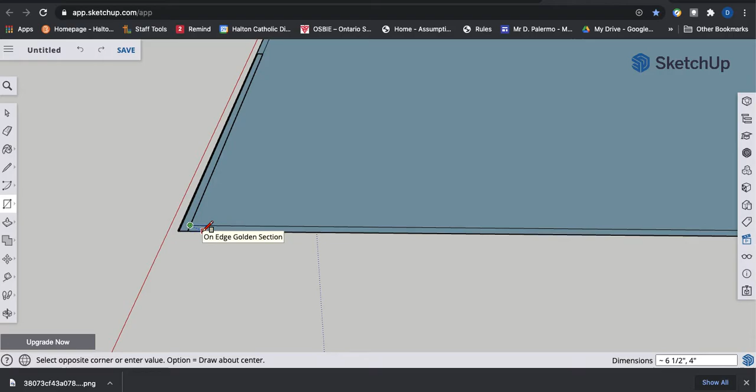To begin, I'm going to hit R on my keyboard for rectangle, and I'm going to create a 2x4 here. So let's just go 2, 4. Although remember, it is 1.5 by 3.5 in actuality. Sorry about that—actually, let's undo that.

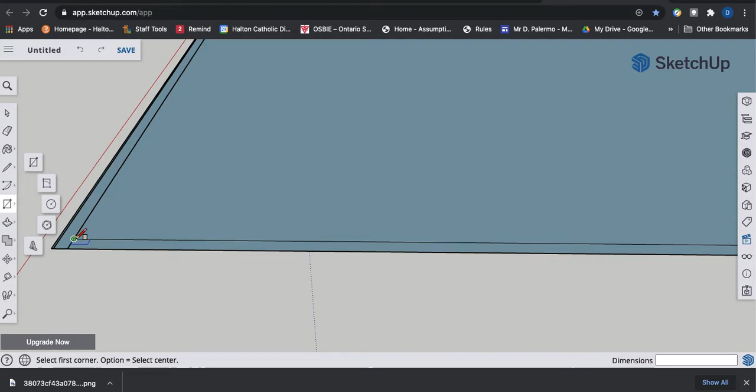I'm going to create my base first, not my stud. So again, let's create another one. Now typically a 2x4, let's say it's a 12-foot piece of 2x4. So I'm going to make it 12 feet—12 apostrophe—and then 4, comma 4, for 4 inches.

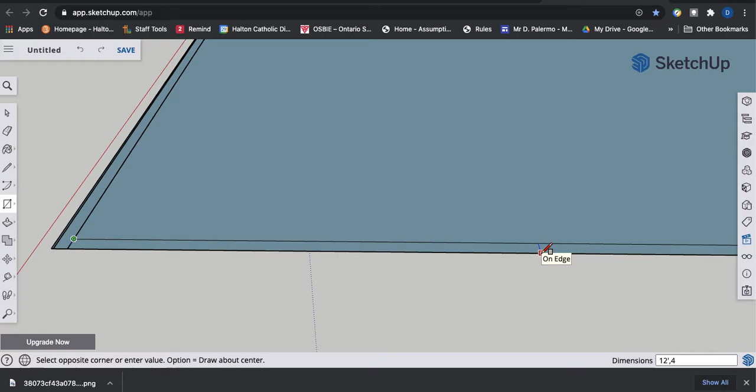Notice I don't have to put the inch mark for inches, because SketchUp recognizes that if you don't put anything there, it's just inches. Okay, so there you go—you have our rectangle there.

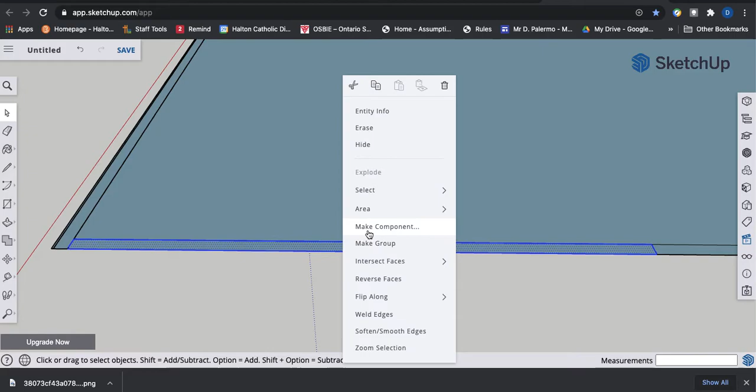Now to select that object, because I want to make it a component before I pull on it or raise it up, I'm just going to start selecting. I'll start with the face, and I'm holding Shift on my keyboard to select multiple items here. There it is, I've selected it all, and I'm going to right click, make component. Let's just call this my 12-foot base.

Now if I want to push pull this base up, I need to double click into the component, press P on my keyboard for push pull, and I'm going to raise it 2 inches, or 1.5 inches in actuality, as the base part of my frame.

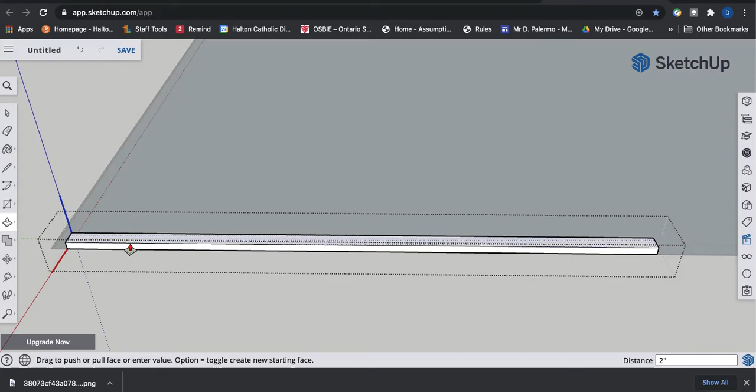What I'm then going to do now is exit out of this component, so I'm just going to choose my select tool and double click in the blank space there. And if I orbit around just so I can see the very front here, pan across...

I'm now going to create another component for my vertical stud. So I'm going to draw another rectangle—this time it's going to just be a 4-inch by 2-inch.

You can see on the bottom right, you might be wondering, should it be 2 comma 4 or 4 comma 2? Well, I know that I drew this 2x4 to be 4 inches, so you can see that the second number there must be the 4 inches. So it must be 2 comma 4. All right, there's my 2x4.

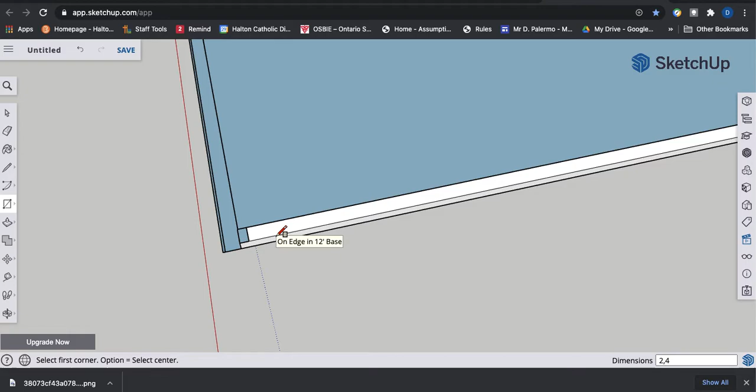And now again, I'm going to use the select tool and maybe zoom in a bit so I can see. I'm going to select the face, hold Shift, select my edges, and right click, make component—vertical component.

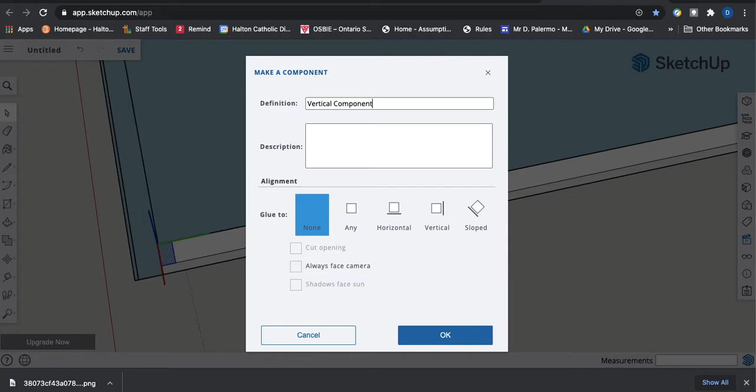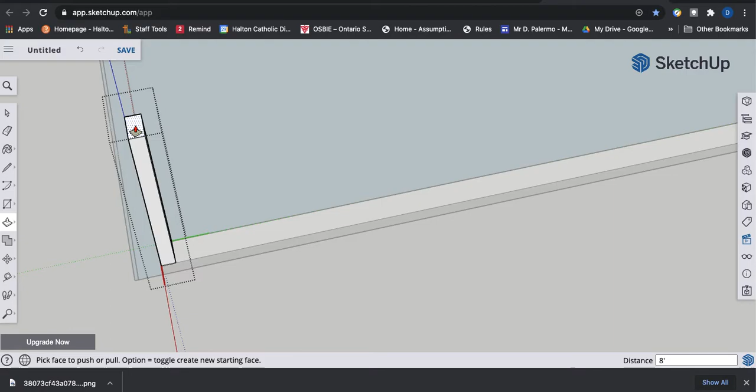All right, double click there and press P on your keyboard for push pull, and let's just assume that our ceiling is going to be roughly 8 feet tall. So I'm going to pull that and just type 8 apostrophe for 8 feet. Again, I'm going to use the select tool and double click outside of that component, and let me zoom out so I can see what I'm working with here.

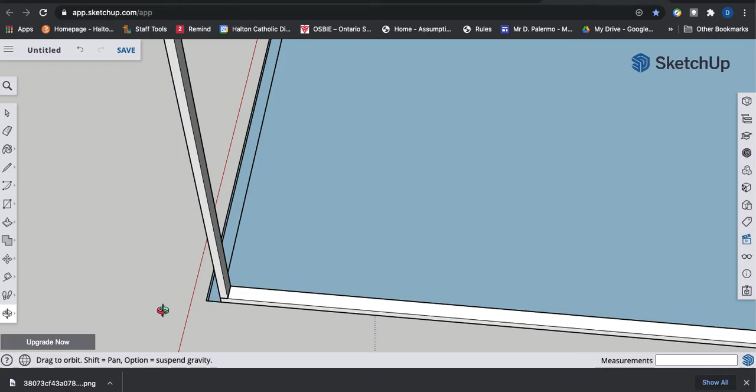Next, I'm going to copy this vertical stud over X amount of times. First, I'll hit the select tool and click once on the component—don't double click it, just click once because I want to move it. Then hit the move button and grab that front corner. I guess it doesn't matter which corner you grab.

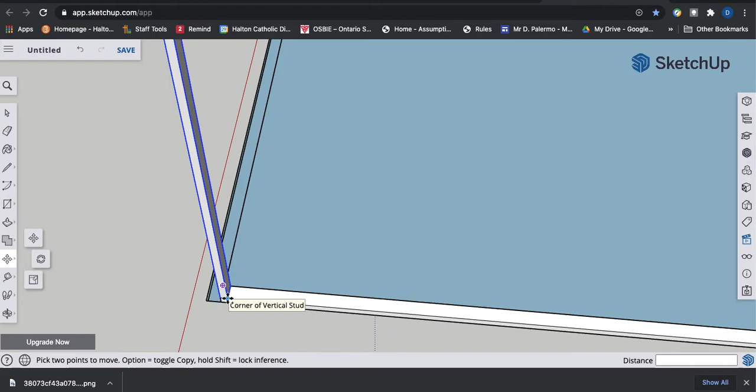What you want to do is hold Alt if you're on a Mac, or Control on a PC—it's either Control or Alt, just double check that. When you press it, you'll see a plus sign pop up. Let me do that again. As I'm hovering my move tool, if I press Alt, you can see that little plus sign showed up, and now when I click, I can actually make multiple copies.

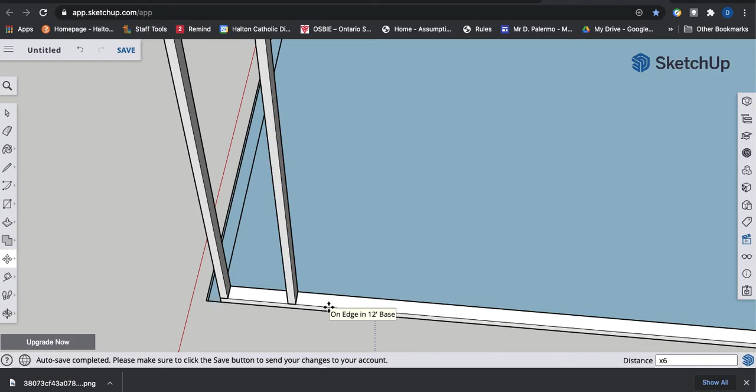Now I want to make this 18 inches away, so I'll pull that out and type 18. Now, without typing anything else, if I press X and then say 6, that means I want 6 copies in total, including the one I just made. So once I move it 18 inches, don't click anything, just type X and then however many you want, then hit enter. You can see 6 copies were made, including the first one I had moved.

So that's a pretty useful tool there—that X and then the number of copies you want to make. That'll get your room, your basement, framed up pretty quickly.

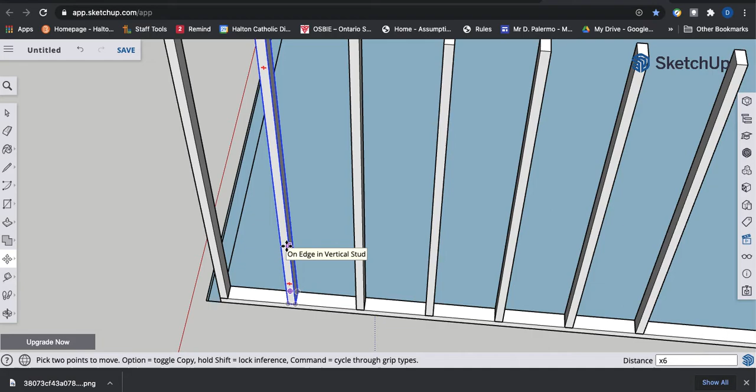Just remember that the corners of each room should have a 2x4 for each corner. There should be another 2x4, like here for example, starting there and going out this way—something like 2x4s butted up against each other for each corner of a room. Remember, you're going to be putting the drywall up against there, and you want it screwed in at its ends for sure. So make sure you do that.

Now, if you're a little bit off there, it's okay—if you're an inch away or whatever, it doesn't have to be exact, but just keep that in mind.

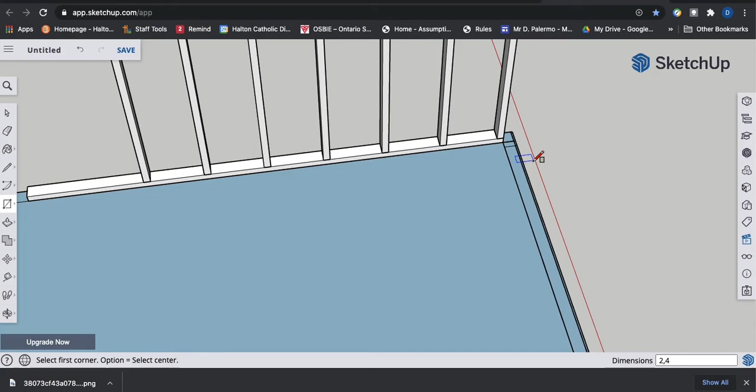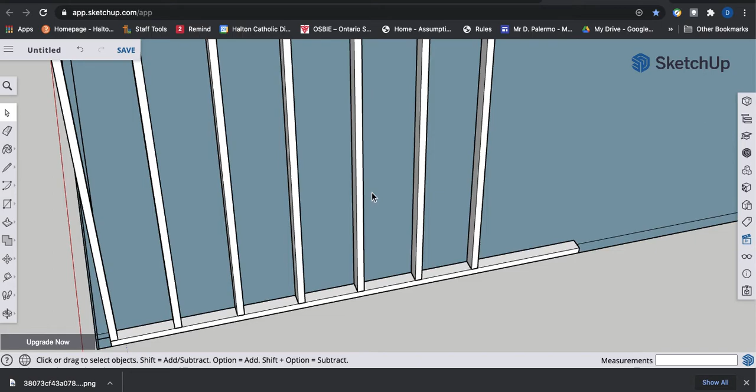Last thing, select this bottom component. Actually, before that—if there's ever a time you want to edit one of these studs but not the rest, here's what happens: if I try to edit this stud, watch. If I push-pull this one, it actually moves all of them, and you may not want that. You may not want to move all of them—maybe just one.

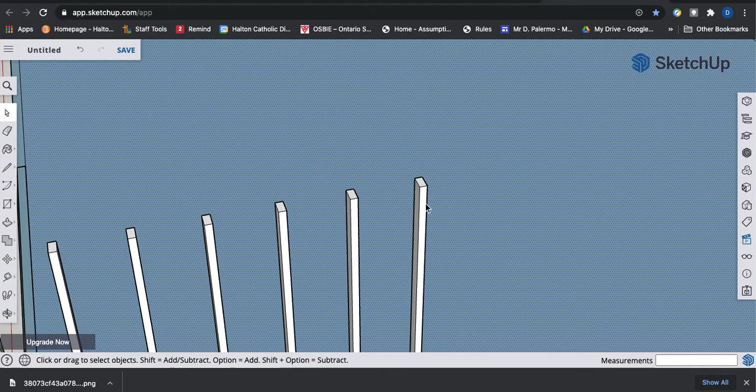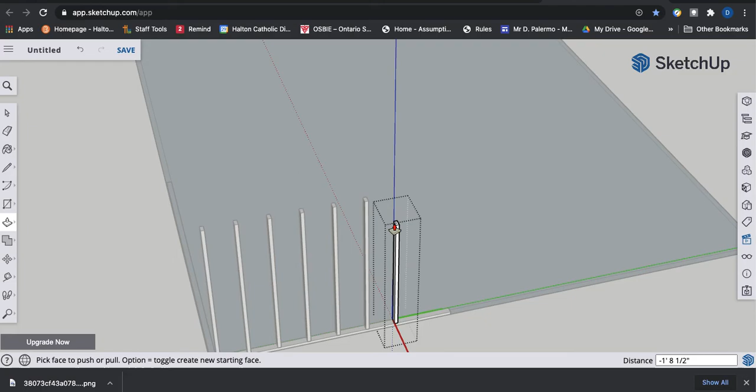Sorry, I'm not using a mouse here, it's a little more challenging. What you do in that case is select the stud you want to make unique—select it once, right click, and hit make unique. Now when I double click into this component and push-pull, it should only move that one stud and not the rest. So that's select by clicking once, right click, make unique.

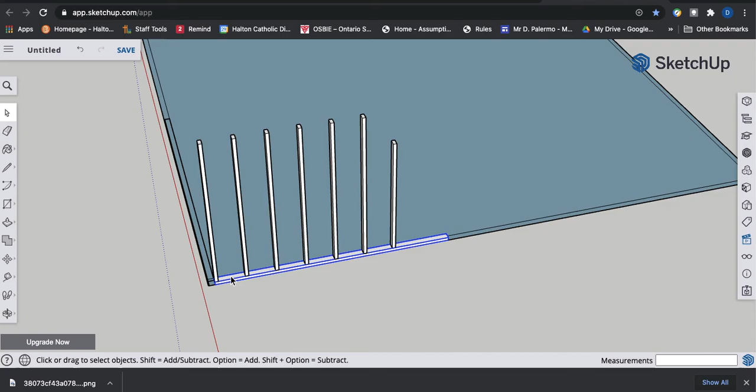Last thing is to move our base up to the top here. Obviously these 2x4s have to be screwed into something at the top, so we're going to select this bottom component and zoom in so I can see this corner.

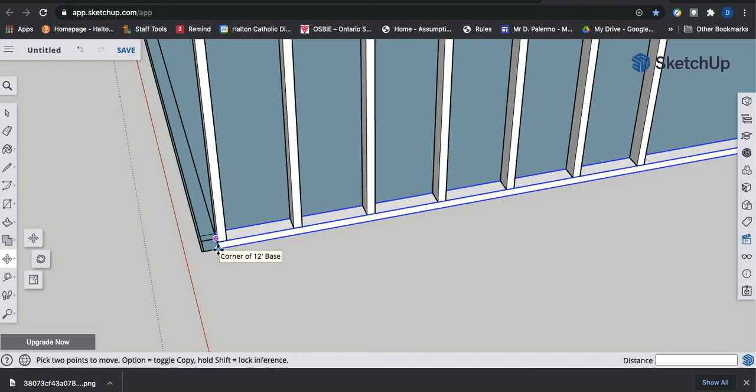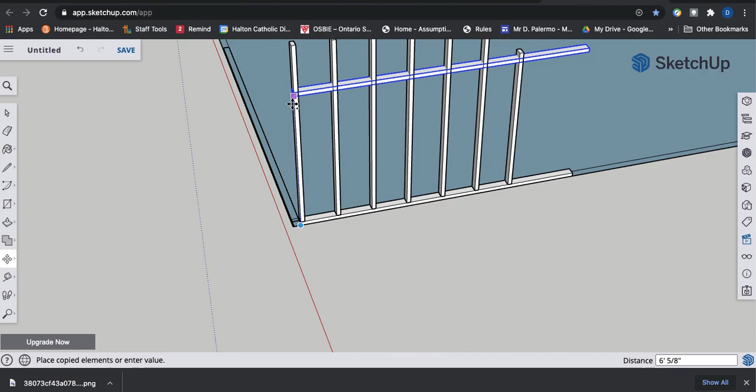What you want to do now is hit the move tool and pick this bottom corner, because it's the bottom corner that's going to be butted up against the 2x4 at the top. I'm going to hold Alt because I want to make a copy of it, then click and drag it up. You can't really see the top on my screen, but with SketchUp, all you have to do is hit Z to zoom out, and then when I hit escape again, it goes back to the part I was moving—so that's just hitting escape after zooming.

And there it is—let's take a look at how it looks. So you'll be able to get through that fairly quickly with some of these tips.